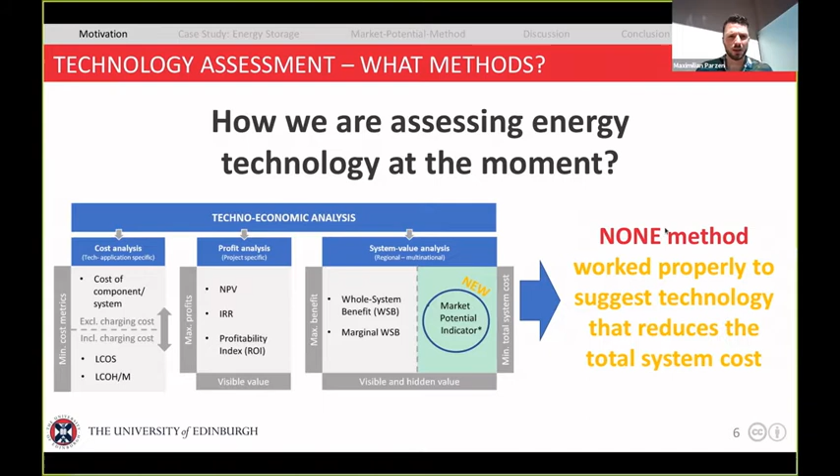When we look at well-used cost metrics like the LCOS for energy storage, it's similar to the LCOE. They really talk about how a minimum LCOS shows some kind of competitiveness, and we're talking about this metric saying one technology is more competitive because it has a minimal cost than the other. But I think that's not really working that well.

We show that today with a small energy storage case study, and we account for values of energy arbitrage and seasonal reserve provision.

So how does energy system modeling work? They generally minimize yearly system costs, which consist of annualized capital cost, what I need to invest, and then the marginal cost for operating these units. What the models do is constrain basically what is possible by adding physics. For example, I cannot produce as much as I want. To have a stable grid, it should just produce as much as is needed, so energy meets the energy demand.

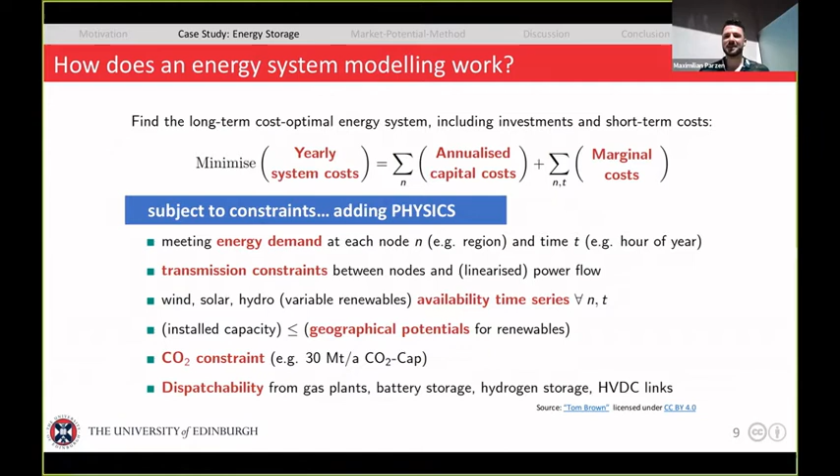So physics is one thing, and realistic data is another thing. The tool we are using for the study is PyPSA-Eur.

It's a workflow to build a model from open data. It covers the ENTSO-E area and contains a lot of data from power plants to electrical demand, availability of different generators. We also have real environmental data on solar and wind situations, and that's what we include to get a realistic representation of the energy system.

What we did in our study is add technologies. We added electrolysis, so basically hydrogen technologies, and battery, specifically a lithium-ion battery. For the hydrogen technologies, we actually divided our categories into a low and high hydrogen storage case, high LCOS storage case.

So we had different technologies. For the electrolyzer in the low LCOS case, we used alkaline, and for the fuel cell, the PEM fuel cell. For the high LCOS case, it's the solid oxide electrolyzer, and the same for the fuel cell. Then just as a benchmark, we had the battery inverter. So we added investment costs, lifetime data, efficiency, discount rate for each technology, and also the energy-related components.

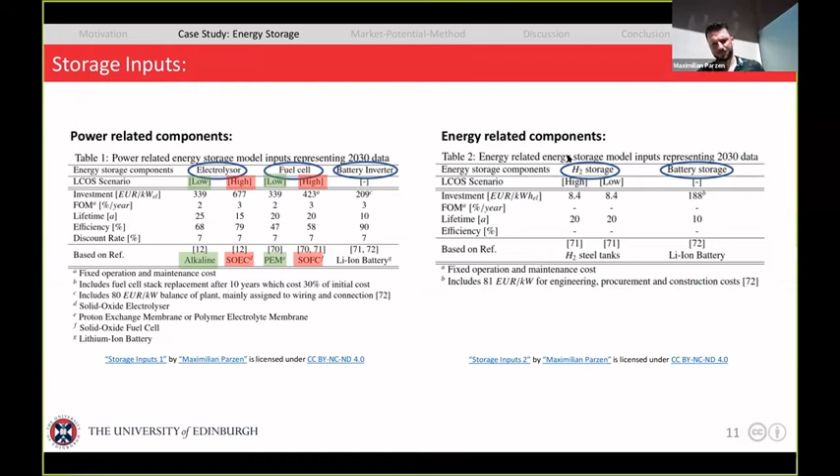What we figured out is, looking just at the LCOS, the battery is definitely the cheapest one. Then there's another low LCOS case, which I just mentioned with the different technologies, and they differ from this high LCOS case by about 5 cents per kilowatt hour. So what you would logically think is, there's a good reason that the low LCOS technology is the preference, maybe that's the technology I should develop. But we'll see in a bit that's not really always the case.

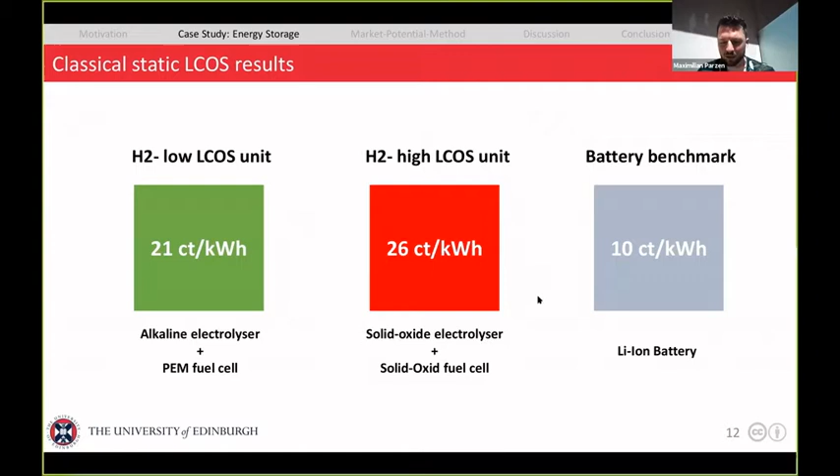So we have really a wide span. Assuming constant full load hours, which is usually used in LCOS studies, is also dangerous, because we have a wide range, from 200 to 800, 300 to 1,200 full load hours, and battery storage is also varying a lot. But what's crucial is that we have a market potential that exists for all kinds of technologies, low LCOS, high LCOS, or battery units. That's the striking point, because it means all technologies lead to a lower system cost. So it makes absolute sense to invest in all of these technologies.

So why do we assess the LCOS? Sorry, can you hear me? Yes, we can. It was just some background noise. Don't worry, it's okay.

So what we introduce here is the market potential method to guide innovation. As you just saw, it's just the market size, which is optimized by the energy model. What we basically say is: look at a set of probable scenarios, assess these technologies, and then make a decision. This decision should be systematic, which is why we introduce the market potential criteria to make this kind of decision, and decisions are actually often subjective in a way, and you will see why.

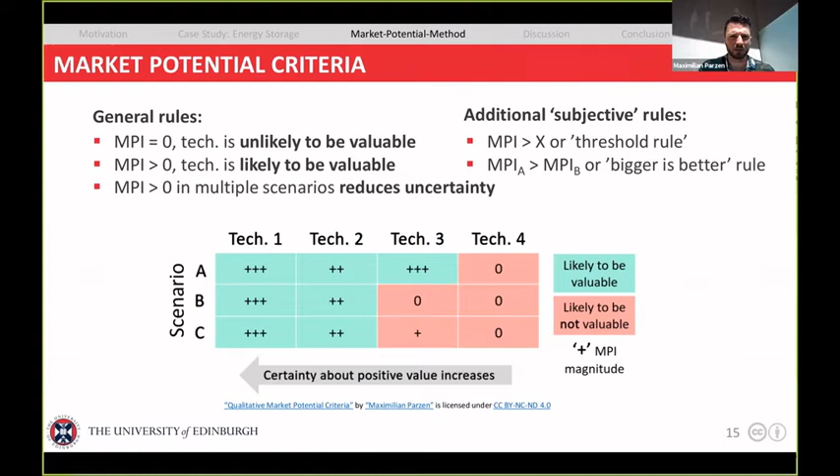So we applied that same method in our case for 3 different scenarios. We changed the technology representation a bit, which is why we have 3 different scenarios. One was related to fixed energy-to-power ratio, meaning we're not sizing any kind of storage flexibly. But in fact, with redox flow batteries or hydrogen technologies, we are flexible with sizing—we can size the charger differently from the storage tank or the discharger. That's what we included in this variable energy-to-power ratio. And in this hydrogen hub ratio, we mixed the hydrogen technology a bit.

So looking at the 3 scenarios and these different technologies—electrolyzer, fuel cells, and batteries—we found that the solid oxide fuel cell, which had a high LCOS ratio, is really a good technology. It's not bad at all; it's actually optimized up to 95 gigawatts in Europe in our 100% renewable case. So this is where you see that LCOS doesn't work well—the technology is really good across all kinds of scenarios.

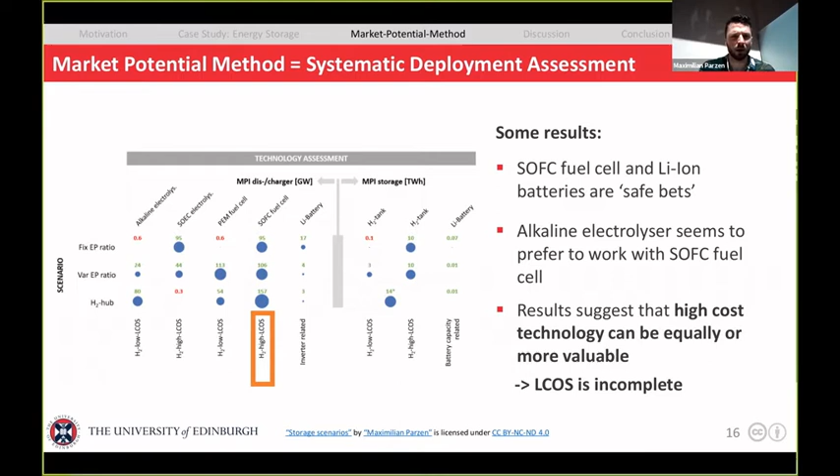Okay, now let's relax and consider that a bit. People might think, okay, these are models, they're not always right, and actually they can never be right—if we look into the future, it's always uncertain. In a way, modeling can improve. We can include other values—for example, in energy storage, there are different kinds of services we provide. We can include more sectors, we can add more technologies.

All right, I think now it should work again.

We can add more technologies. We can improve the data situation. We can put better data into this model. We can expand to new regions, adding nonlinear effects, and improve also the energy market representation, because the market doesn't really work as perfect as we think.

But one key point is that modeling can at least improve, and these other methods actually have this flaw in the method itself. It can be also sometimes, I'm not saying that LCOS is not always good, sometimes it can be good, but especially for seasonal storage technologies or other technologies, it might be worth additionally considering this kind of market potential.

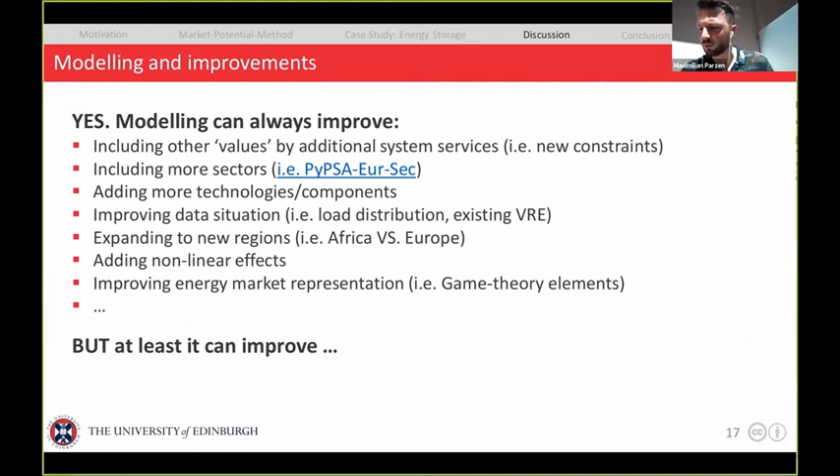And one really key message you should take away is that lower cost is not equal to higher value. We heard that a couple of years ago from Lion Hirth as well. He was actually an inspiration to this work here. He tried also to come up with a method.

I wasn't so convinced by that, and that's why we developed the market potential method, which is not something crazy from the methodology. We're just looking at what technology is deployed, but we figured out in our paper and wrote it down why we're doing that and why other methods have problems and limitations, and why maybe this method could add some extra features.

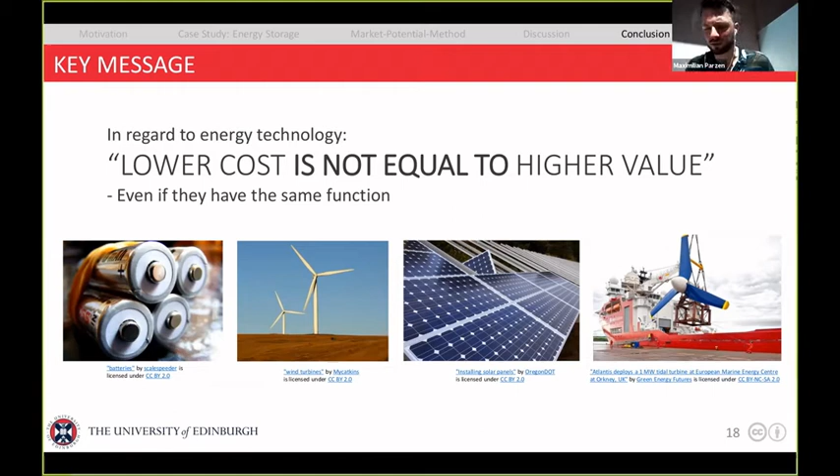Looking at applications of the market potential and some future work: where you can use the market potential method is really to give technology design recommendations. You can say, okay, what storage is good? Is it a low wind generator or high wind generator that's good? Where should I place my assets? What is the value of demand response? How should I design demand response?

Evaluating also energy technology market potential, so how big is my market for each technology? That's the stuff I can really do with this metrics method that we developed. And that's key, I think, for business decisions.

Future. Sorry, yeah, Maximilian, to interrupt you — we just finished the time of presentation. Thank you very much. I don't know, you can wrap it up. Yeah, if you give me one minute. Yes, okay, yes, of course.

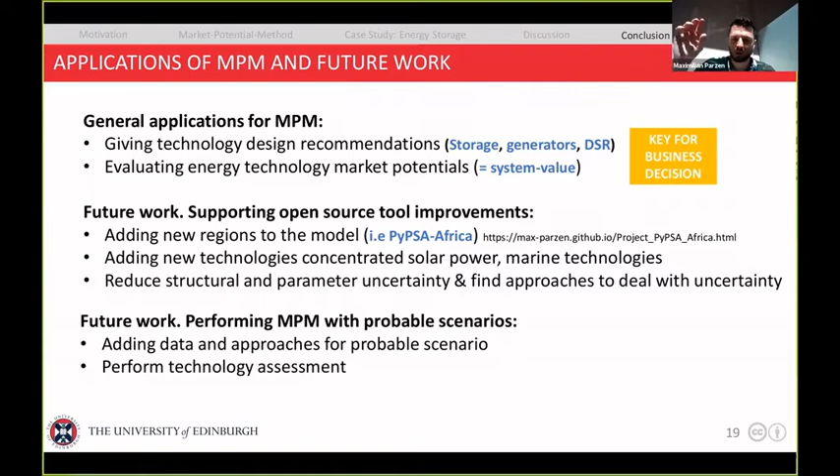I just want to mention that we are working with a team now on expanding our model to Africa, just to give this worldwide view of the market potential, because a company just doesn't want to look at one continent. They want to, in the best case, look globally. And we're starting with adding now Africa to this model. The project just started recently. We are more than 13, mostly PhD students, working on that. I have 10 advisors, and if you're interested in the project, just look it up.

And that's it. Yeah, thank you very much. Thank you, Maximilian, thank you very much.

So this first presentation was very nice, and it was very clear for me. I think there will be many questions, and I can see at the end Rodica has some. So I give you the floor, Rodica, for the first question.

Okay, so good morning. Thank you, Monsieur da Costa. Thank you, Maximilian, for this very nice, clear presentation from your sunny corner. First of all, I would like to be sure your LCOS is based on the energy discharge. Is that so? Do you have a formula? So your levelized cost of storage is based on the energy discharge only, is that so?

Yes, I can show you the equation. Okay, so I'm waiting for the formula, but how different in this case is this LCOS from the classical LCOE, from the traditional LCOE? How different is this, where storage is accounted for?

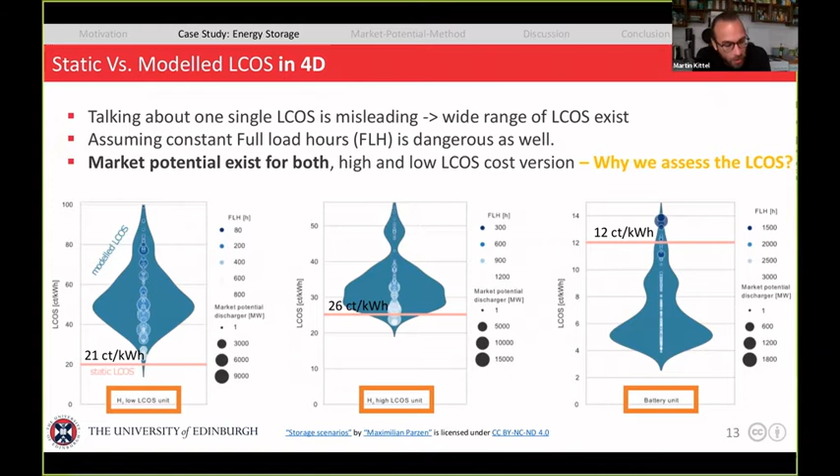Yes, hi. Max, thank you for the insightful presentation. It's an interesting approach. I was wondering, when I saw your scenarios, you want to come up with an approach that evaluates the market potential. So your idea, if I understood it correctly, is to look at different scenarios and then see which technology always remains within the optimal capacity mix, so to say.

But I was wondering about your scenarios because they're specified to some modeling intricacies, right? Whether you have a fixed E to P ratio or variable E to P ratio, and the applicability of some storage technology also depends on the constitution of the optimal capacity mix. So I was wondering, why do your scenarios refer to these modeling specifics instead of, for example, looking at a different capacity mix, right? One scenario with more PV and one with more wind.

I think that's, thanks, Martin. I think you spotted something really important. Maybe I forgot to mention it. The scenario selection we chose is not complete.

What you should do in a best case is, for example, pick the ENTSO-E scenarios, which people align their view on, like the ENTSO-E outlook. They have 3 different scenarios, and I think if we could apply this methodology to these ENTSO-E scenarios, then we'd have different views. And if I'm a storage developer, I should also consider maybe 3 different technology constraint scenarios. So at the end, 3 times 3 would end up with 9 scenarios, to have this technology detail and differences, and also this kind of 3 realistic, probable future scenarios.

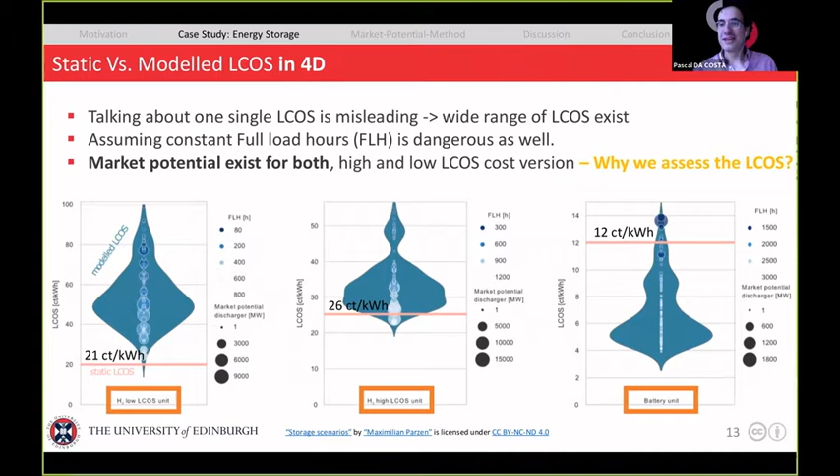Okay, good. Martin, is it fine for you? Or do you have other questions or discussions? No, thank you, that basically answered my question. Thanks, thank you, Maddie. So if there are no new questions, we can move to the next presentation by Martin.

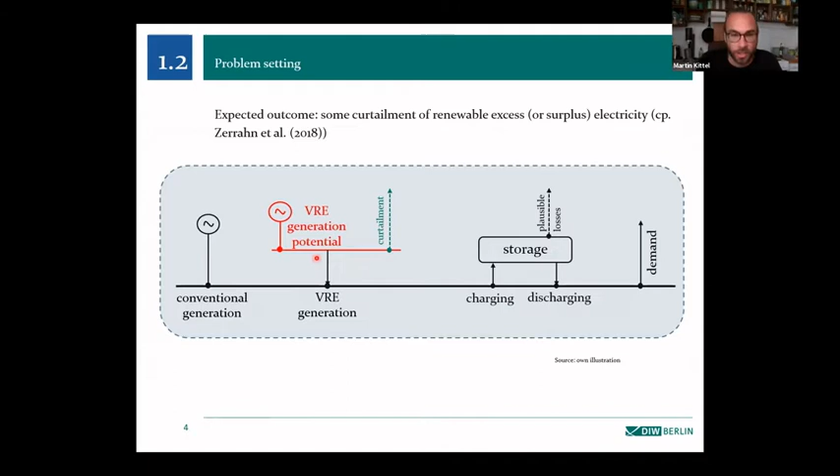So as I just mentioned, what we expect an energy model to do if there is surplus renewable generation due to beneficial prevailing weather conditions is to curtail this excess electricity. However, if we now impose a minimum renewable share of this form, so that total annual generation from renewables has to exceed a certain share of annual demand...

what can happen is that we see unintended effects, and these effects are as follows: since the model, due to this constraint, is inclined to drive up renewable generation, it may occur that it does not curtail the renewable surplus, but instead feeds this excess electricity into the grid and then erases it via charging and discharging the storage unit within the same period. And this charging and discharging then creates additional unintended storage losses.

So we define this phenomenon as unintended storage cycling, which is simultaneous charging and discharging of the same storage unit. We consider this excessive because in the end, when you work with energy models, only the net effect of charging and discharging matters for the energy system balance. And again, this behavior only arises within energy models, it's not a behavior that we see out there in reality, but only in our models, yet it potentially causes unintended effects, as we just discussed.

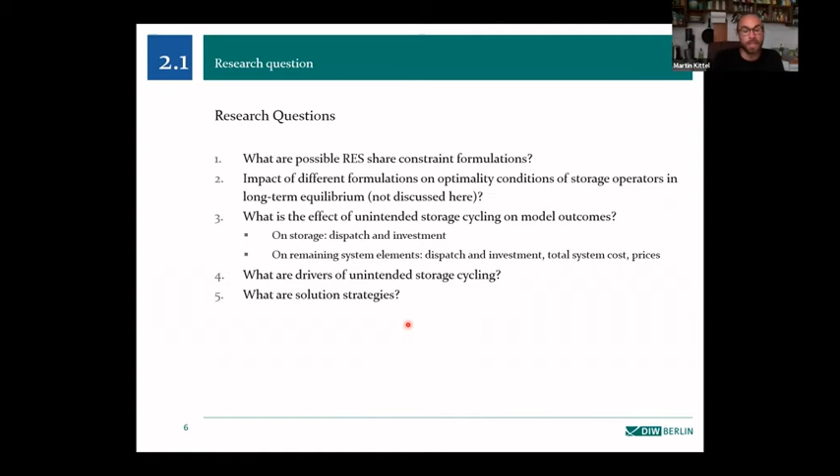So what are our research questions? First, we would like to systemize possible ways to implement renewable share constraints. Second, we would like to investigate the effect of these different formulations on optimality conditions of storage operators in long-term equilibrium - this is not really discussed here due to time constraints, it's part of the paper. Third, we would like to quantify the effect of this modeling artifact on numerical model outcomes, namely on storage and remaining system elements, and we'd like to identify drivers and, in the end, solution strategies for the artifact.

Are these questions relevant at all? Well, we believe they are because binding renewable targets are commonly used in climate policy. For example, in Germany, Germany foresees a 65% share of total consumption being from renewable energy sources by 2030, or most recently, the Biden administration announced the target of a fully renewable power sector by 2035.

In order to investigate possible pathways for reaching these targets, numerical models are used both in the research domain and in policy consulting. This artifact, unintended storage cycling, potentially distorts model outcomes and thus also policy recommendations, and we would like to avoid that.

So these renewable shares are also commonly applied in the modeling domain. Let's move to our methods. We first looked at 12 different implementation strategies for binding renewable energy targets. We have first 4, let's call them constraint families.

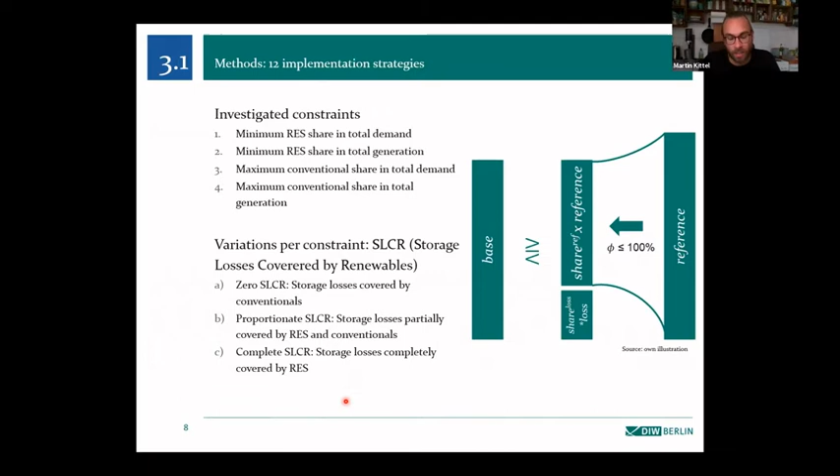We use a stylized numerical power sector model, which is essentially a reduced version of the detailed model that we use here at the DIW. It depicts a power sector only for one region, and is a linear partial equilibrium model that essentially minimizes total system costs. Max, thank you for this introduction on energy system modeling.

So now you already understand how these kinds of models work. We have just a very limited set of renewable generators and conventional generators and one storage technology, and the model optimizes both capacity and dispatch decisions for one target year. We parameterize our setting loosely to the German power sector for 2030.

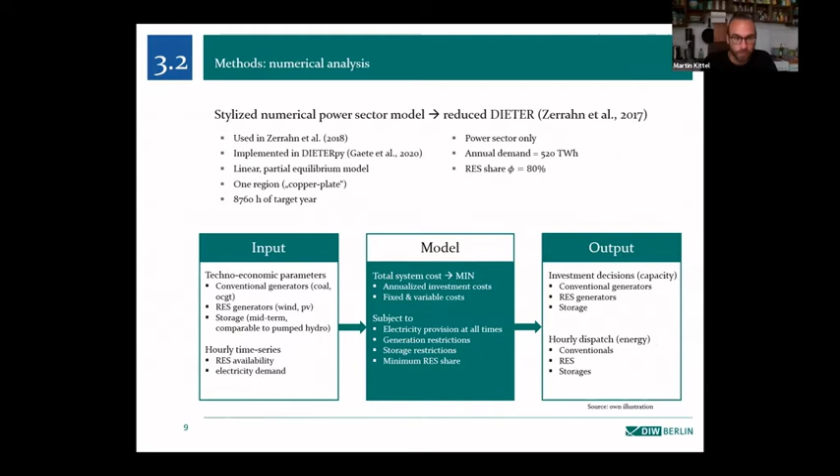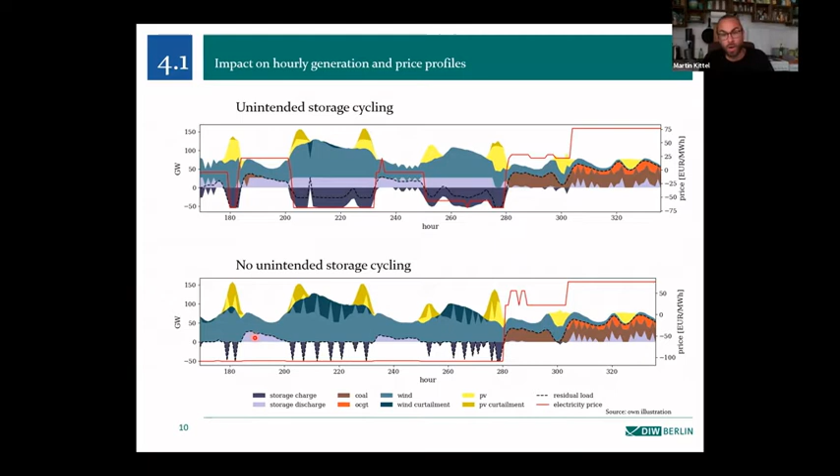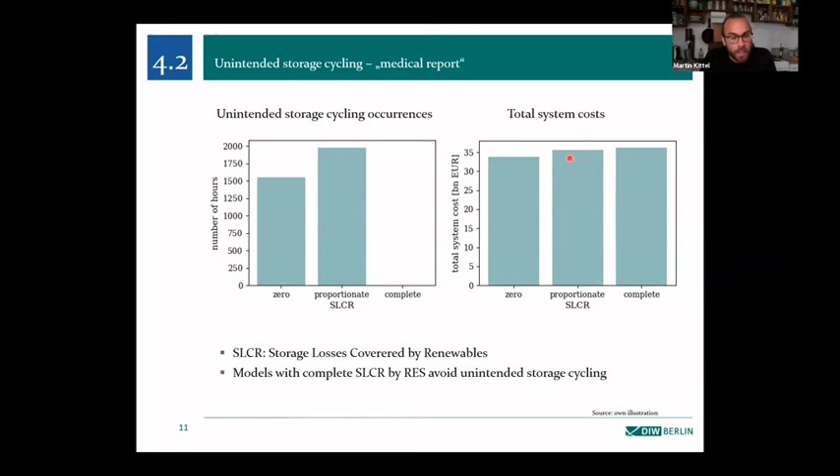We have, even though it's a very stylized setting, a number of complex effects that are somewhat amplifying and overlapping each other, but I'm going to try to highlight the most important ones here. So first of all, what do we see?

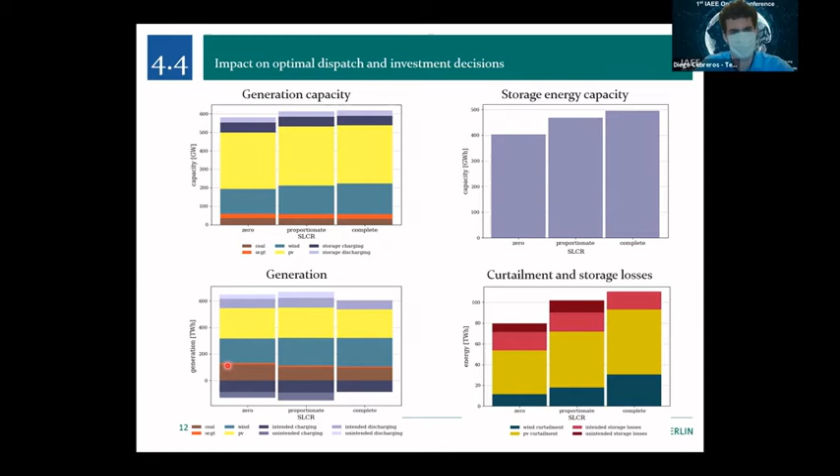Let me mention one more effect. Effectively, and this is a bit hard to elaborate or show, these different variations—zero storage losses covered by renewables, proportionate distribution amongst conventionals and renewables, or requiring storage losses to be completely covered by renewables—effectively increase the ambition level of the renewable constraint. Here in these settings the ambition level is lowest, and then it increases up to here. So all these effects I just presented are partially also driven by this different ambition level of the renewable constraints.

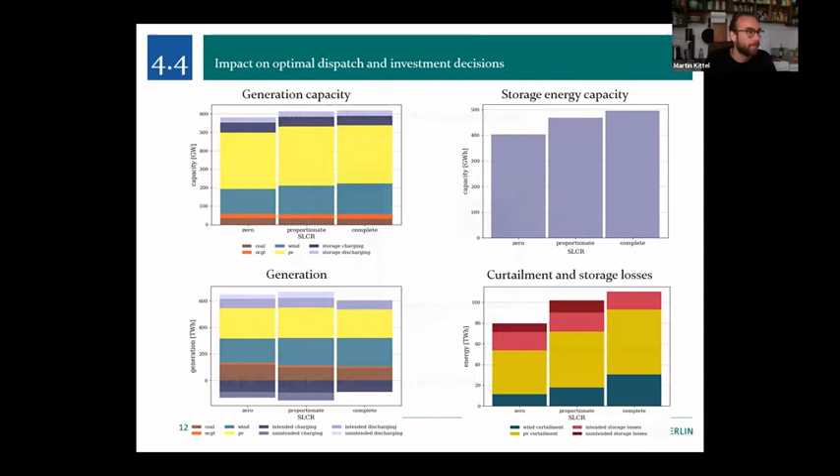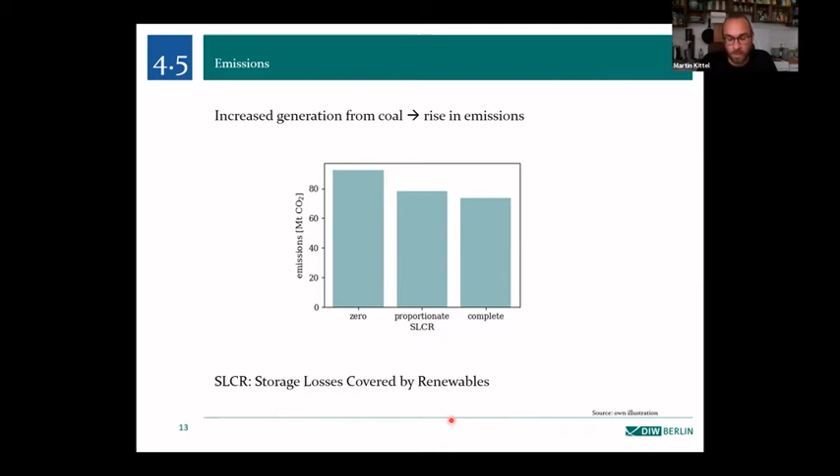Maybe one more point, not a key insight but a consequence of this change in the generation mix, is that we have an increase in emissions. Given the context of binding renewable targets, which is meant to facilitate decarbonization, this is also an important insight—if the modeling artifact occurs, in the end emissions in the system will rise.

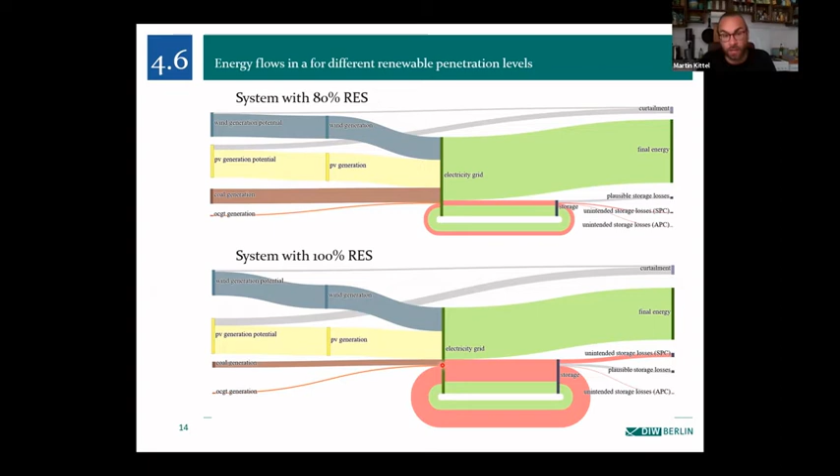What we see is that the extent of unintended storage cycling rises disproportionately for higher renewable shares. So as we move towards a fully decarbonized power sector, the artifact's impact actually increases.

So what are possible solution strategies? As we already have seen, requiring in the renewable constraint that all storage losses are covered by renewable generators solves the problem. That's very important, and this is also our recommendation how to treat the problem. However, one needs to be aware that this is overly restrictive.

This constraint then requires a little bit more renewable generation than the policymakers' notion of a renewable share actually requires. Policymakers say the renewable share is total renewable generation over all generation in the system, which implies storage losses should partially be covered by renewables and conventionals. Here we recommend that all storage losses should be covered by renewables.

There are also possible alternatives, and due to time constraints, let me only discuss the CO2 versions. You could impose a CO2 budget or a CO2 price, and if storage use in energy models is priced, so if there are costs attributed to storage use, then the modeling artifact does not occur anymore because the model has no incentive to drive up renewable generation.

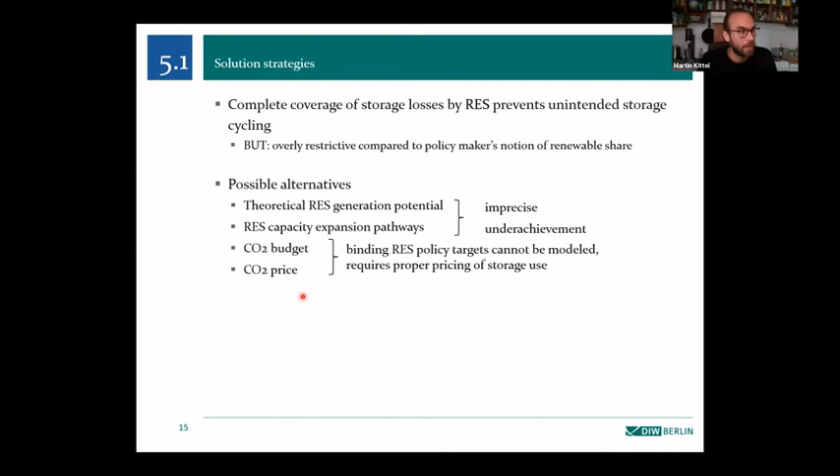Let me mention one more very important factor when departing from our stylized setting with the power sector only and moving to more sophisticated, full-fledged energy system settings, where you also look at sector coupling options, for example.

What we see is that unintended storage cycling is essentially a special case of unintended energy cycling. So wherever in the system the chance arises to convert curtailment into additional losses, be that, for example, conversion losses for battery electric vehicles or standing losses for liquefied hydrogen, or even transmission losses in a multi-regional setting.

The model will always be inclined to convert surplus electricity into these kinds of losses to meet the renewable constraint at lower costs. So wherever unintended energy cycling is possible in these models, the artifact may occur and may distort modeling outcomes.

So to wrap up, what have we seen? We have seen that unintended storage cycling has a significant effect on modeling outcome, and implementation matters.

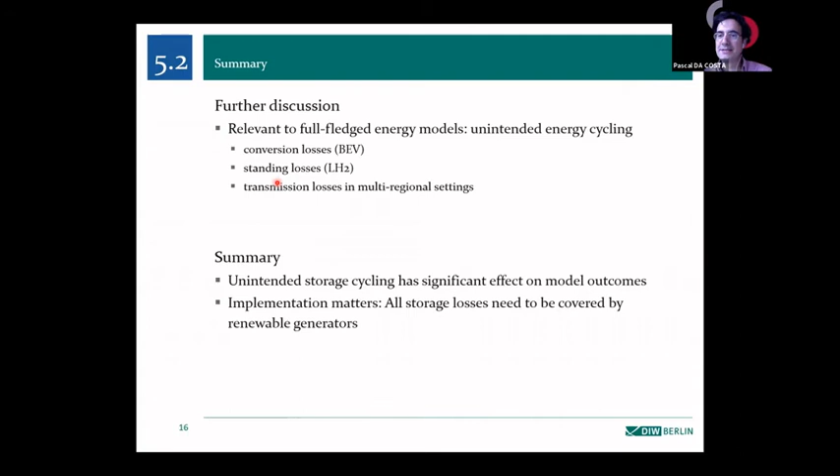Thanks, Martin, for this wonderful presentation. I just want to strengthen the point that in modeling, Martin and I are collaborating on this topic as well, on how to remove this effect in energy models. We also discovered this effect in PyPSA-Eur, and we counted, I think, 5,000 hours. I think you mentioned around 2,000 hours; we counted some 5,300 hours or something like that. So it's really something that can happen if you're not modeling carefully, and it can distort your technology's behavior in a way. That was just a comment. Thank you.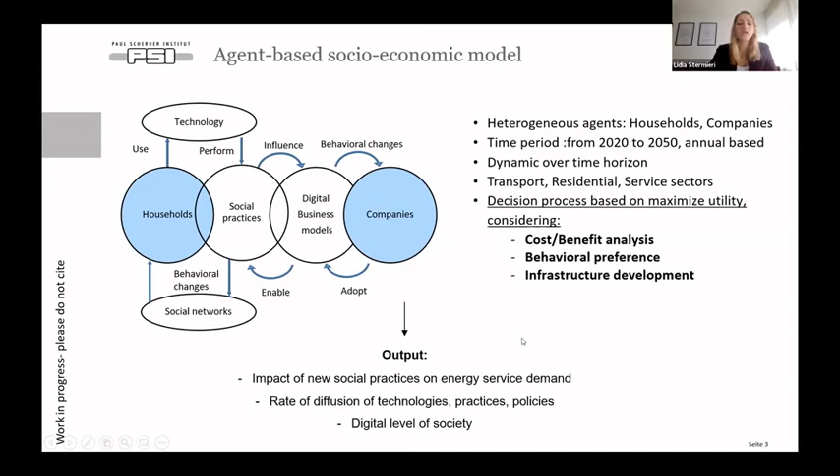The time period the model covers goes from 2020 to 2050 on an annual basis, dynamic over time, and includes different decision processes that we will analyze later. The outputs from this model are the impact of new social practice on the energy service demand, the rate of diffusion of technologies and practices, and the digital level of society.

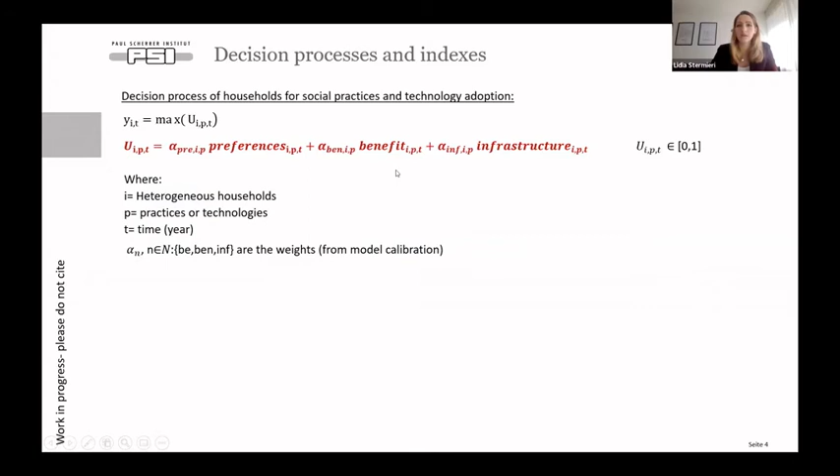So let's analyze the two decision processes. The decision process of households for social practice and technology adoption is based on wanting to maximize the utility function, and the utility function is based on three main components: one is the preferences, one is about the benefit, and one is about the infrastructure development.

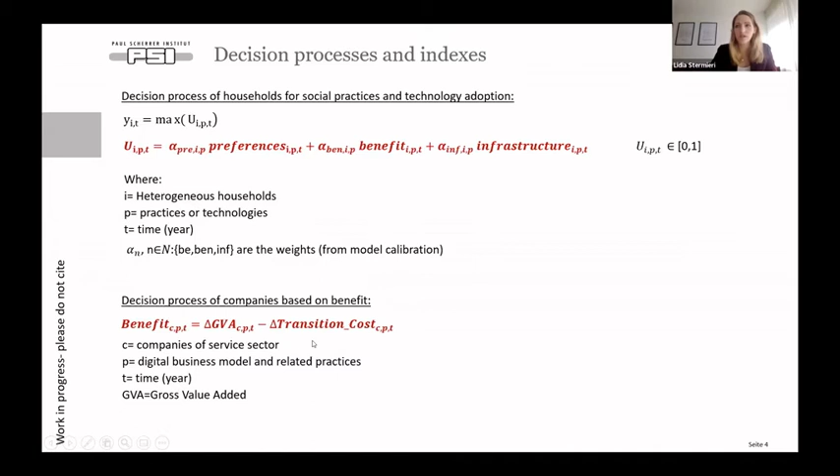Instead, the decision process of companies is based on the benefit. The benefit is calculated as the evolution in the gross value added minus the evolution in the transition costs, which are the costs to move from an analog business model to a digital business model for the company.

Now let's start with discussing the decision process of households. The first component of the utility function is the preference. Basically there are household preferences and technology attributes, and we want to select the technology that better matches the preferences of the households. Let's give an example of how this component works.

If we want to analyze household preferences for the concept of environment, we can see that this household gives the environment the maximum value, so 1 - all attributes go from 0 to 1. This household has to select between two different technologies, technology 1 and technology 2, which have two different values for the environment attribute. From the calculation of preferences, we see that for this household, the best technology that matches his preference is technology 2, where we have the highest value for preferences.

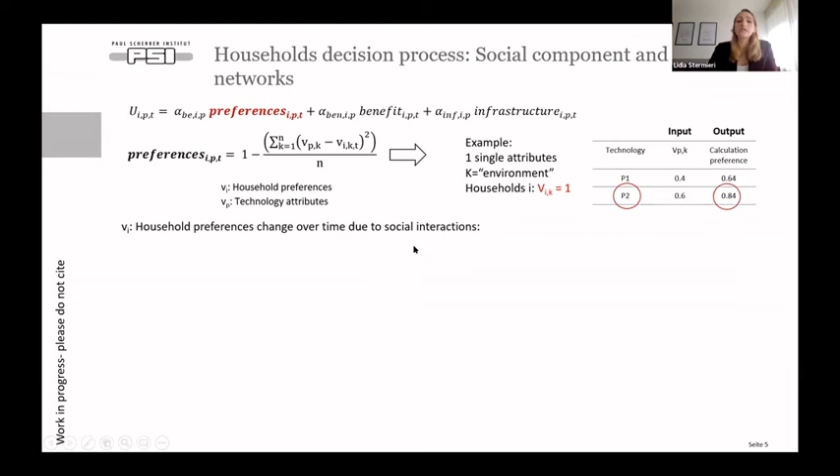The households' preferences change over time due to social interaction, so we also simulate a social network in our model. Actually, there are two different social networks. One is the set of agents that are in the physical network of agent i - basically there is a neighborhood.

The second network is the virtual network that basically simulates the network created through social media. The agent is then able to change its preference and its behavior through interaction with other agents, following a social opinion dynamic. The two main parameters for this interaction are the speed of preference change - each agent has a different adaptation to a new preference or behavior - and also a trusting interval, that defines when an agent decides to interact with another agent and change its preferences through this interaction.

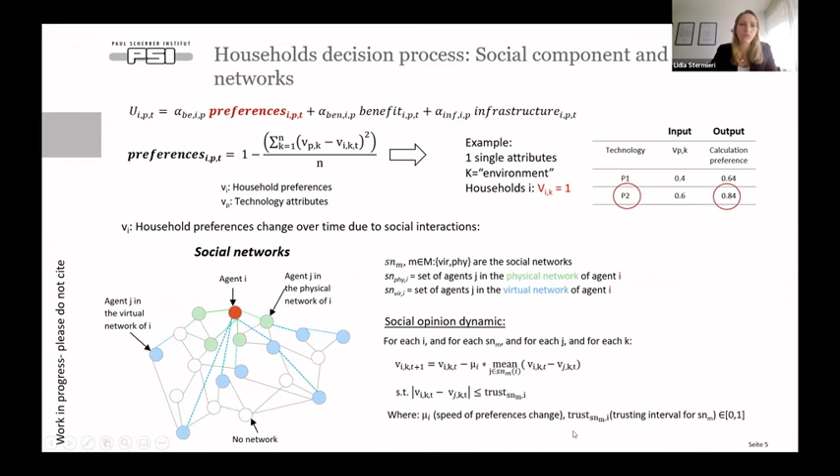The second and third components of the utility function are represented by the benefit and the infrastructure component. The benefit component accounts for the budget of the households and also the annualized net present value for the technology, defined considering the capex of the technology, the opex of the technology, the lifetime of the technology, and also the discount rate. Here we can immediately see the connection between the two models I told you before, because all the information for the calculation of the annualized net present value is an input from the energy system model.

We also said there are different sectors simulated in the model: transport, residential, and services sectors. We can see, for example, how these sectors interact through the budget, because the household's budget has to be distributed across different technologies that belong to the transport sector or the residential sector.

And in the end, we define also some deployment of infrastructure for the different residential sectors. When we model the transport sector, we include the infrastructure deployment as a society component, but we consider also the anxiety of each agent for the deployment of this infrastructure. This anxiety depends on how much you need to use this technology.

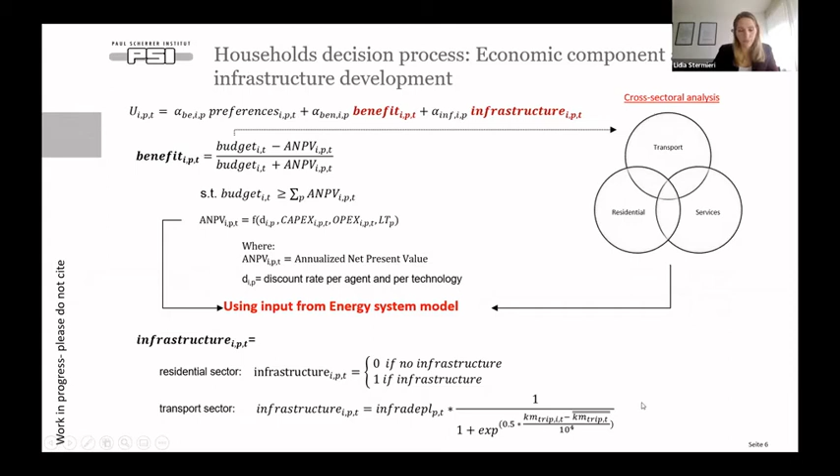Then we can move to the decision process of the company that is based on the benefit. We have that the benefit is positive, or if the benefit is negative but the willingness of the employees of this company to perform a practice is higher than a threshold value, then the companies decide to invest in digital business models, increasing its own digital level. Otherwise, there is no investment. This means that the practice is not allowed, and the households have to change their decision process.

So from here, we can see how companies account for the decision process of households, and at the same time, how the decision process of households is affected by the decision of the companies.

To give you an example of the cost-benefit analysis for a company, we can think about the teleworking practice as a new social practice enabled by the diffusion of ICT. In the transition cost from the analog to a digital business model, we consider the cost of ICT, the training courses for employees, the network infrastructure, the evolution of the energy cost, and the administrative cost. It's also important that only sectors that can adopt a certain type of business model are considered in the analysis.

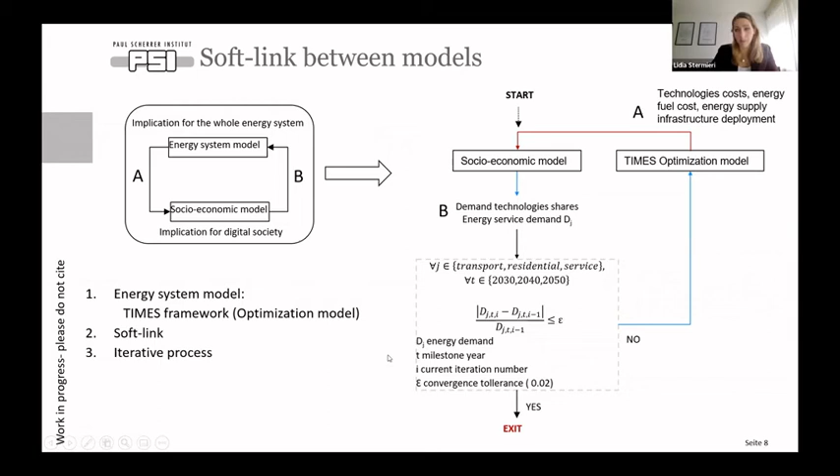Now, the link between these two models is also an iterative process. This means that these two models iterate until the convergence tolerance is reached. The convergence is analyzed for each sector, each demand, at each time step. So this is how the links work.

Now let's move to the analysis of case studies for Switzerland. And why Switzerland? Switzerland has a net zero climate target for 2050, wants to withdraw from nuclear energy, and promote renewable energy resources and energy efficiency. At the same time, there are some challenges because Switzerland has to maintain a clean power generation sector, has to face some limited renewable energy resources, and has to assure a security of supply.

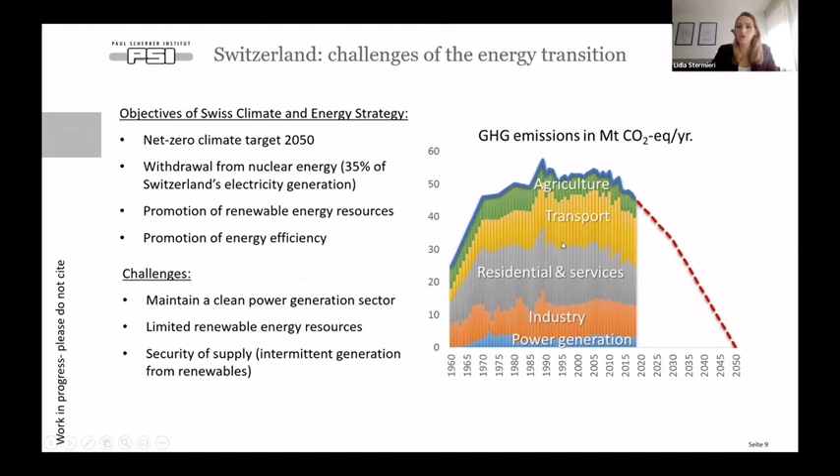It's important to note that there is already a net zero scenario for Switzerland that has been analyzed in the joint activity scenarios and modeling. We can see that to achieve this net zero target in 2050, the system has to invest in solar PV, electric and hydrogen cars, heat pumps, energy saving measures, hydrogen, biofuels, synthetic fuels, or carbon capture and storage CO2 technologies.

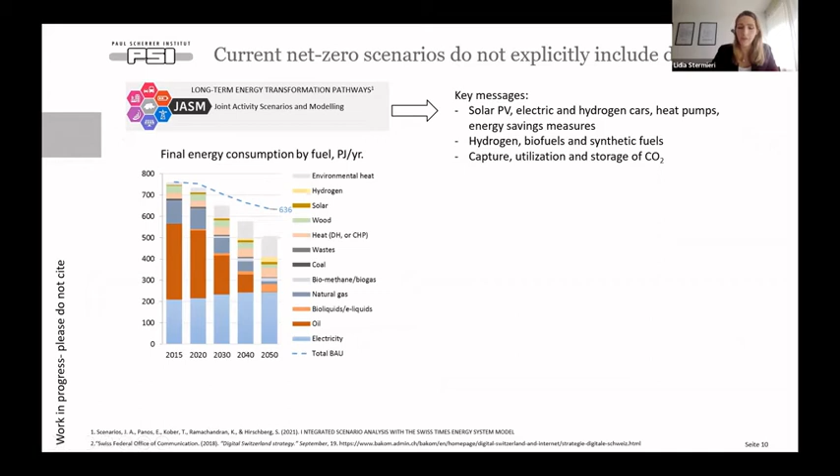But what we also want to analyze is the fact that Switzerland has a digital strategy, and it recognizes as a main point in this digital strategy the development of digital business models, the improvement of digital empowerment of the population, and the development of infrastructure. So the question is how to include this digital strategy in the net zero scenarios in order to include all the opportunities and challenges identified in the digital strategy.

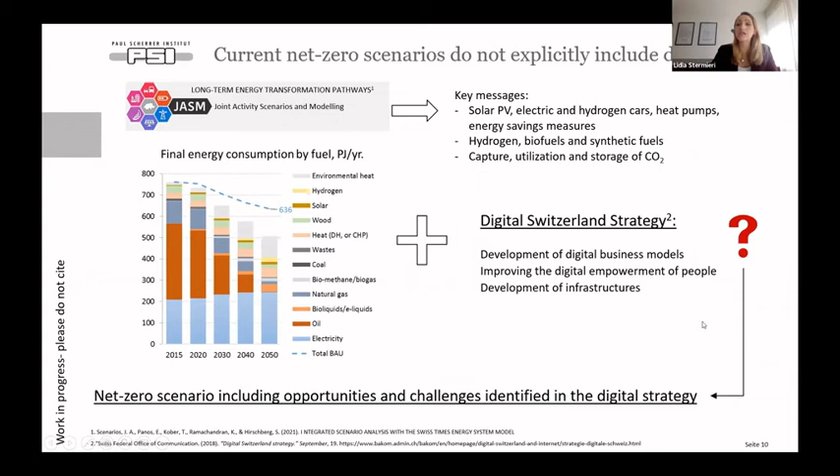Furthermore, there are several favorable conditions for the digital transformation in Switzerland. First of all, 70% of the Swiss GDP is generated by the service sector, and Swiss firms are small and medium-sized enterprises. Also, there is a stable political system with attractive economic policy.

So these are good bases to analyze the opportunities that digital transformation can bring to the society. Some of them are, for example, that digital transformation can increase resources and process efficiency, but can also ensure value creation, growth, and well-being.

So we finally apply our framework for Switzerland, and I want to focus on two main points here. The first one is the huge set of databases that we use to initialize, calibrate, and validate the socioeconomic model. There are several surveys, technology data sets, and a lot of statistics, and all these databases came from different fields of study.

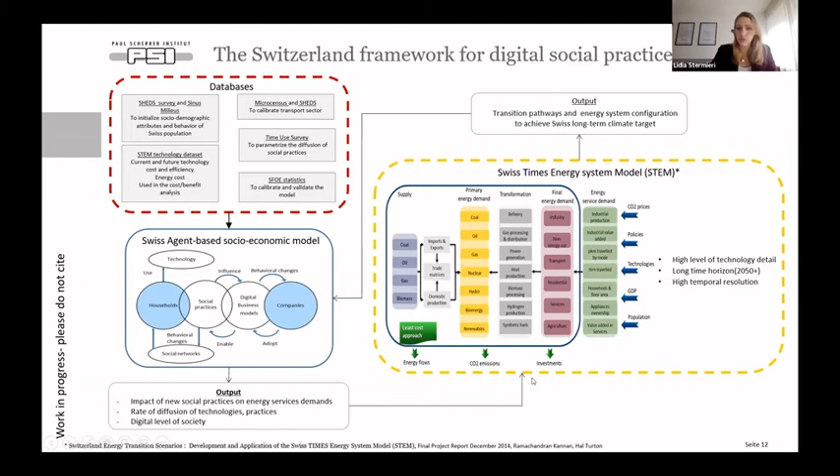So we are also able to integrate all these different sources of information in the socioeconomic model. The second point is that Switzerland already has a Swiss energy system model called STEM, developed at the Paul Scherrer Institute, which is able to represent the whole Swiss energy system with a high level of technology detail, a long time horizon over 2050, a high temporal resolution, and is also based on a least cost approach.

So now we analyze a case study to see how our framework works. We apply the net zero climate target to one social practice, as discussed before, for example the teleworking practice, and we analyze this for three different scenarios. There is a base scenario in which we assume that people performing this practice will work from home 30% of their annual working hours, and 30% of their meetings will be online meetings.

Then we have a digital scenario where this share goes up to 60% of the annual working hours, and then a new world scenario where the share is equal to 100% of the annual working hours. We want to analyze the implications this practice has on the business models for the service sector and on the net zero climate target.

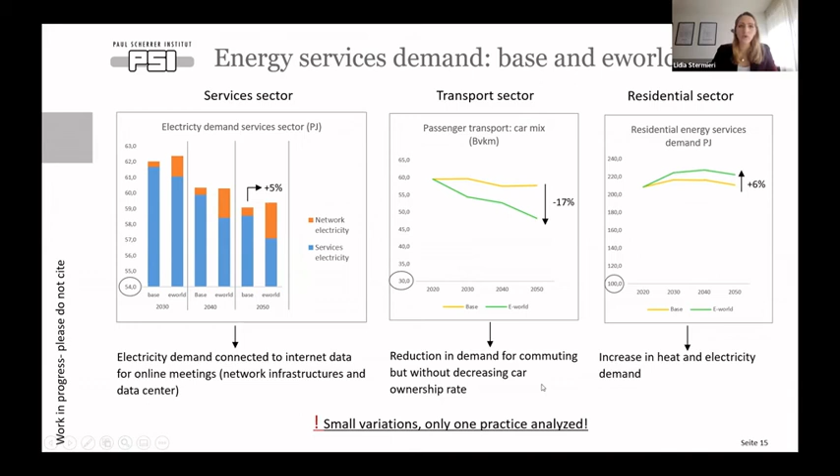Of course, these are really small variations, and we have to consider that only one practice in this case is analyzed. But even if these are small variations, we can see some implications for the energy system by analyzing what happens to CO2 emissions in 2050.

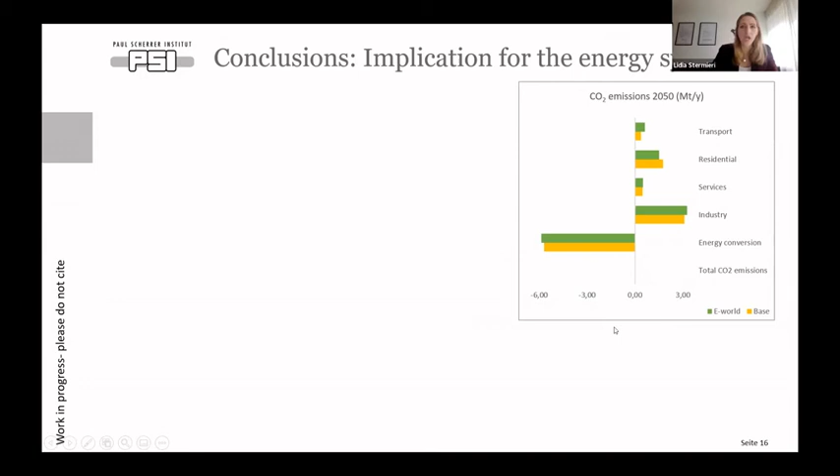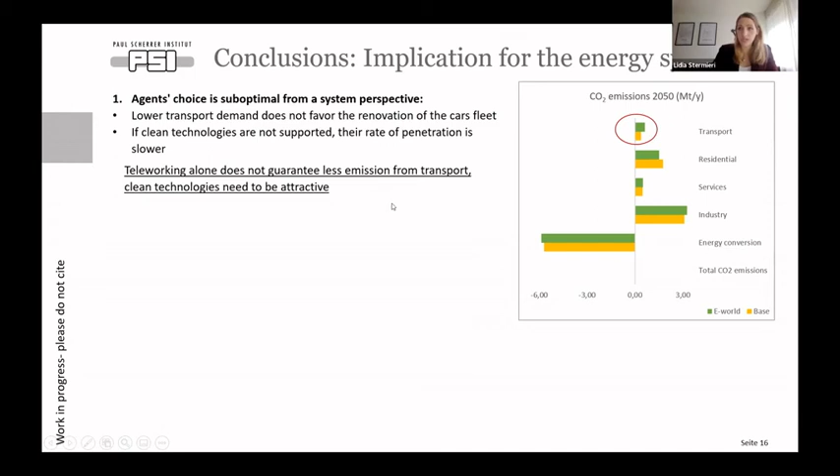The first point is that in a digitalized scenario, transport increases its emissions. This is connected to the fact that the agent's choice is suboptimal from a system perspective. The lower transport demand does not favor renovation of the car fleet if clean technologies are not supported, so the rate of penetration is lower. We can conclude that teleworking alone does not guarantee less emissions from the transport sector if clean technologies are not attractive.

We can see how the energy system reacts to this increase in emissions from the transport sector: it reduces emissions in other sectors, shifting renewable resources from industry to reduce emissions in the residential and transport sectors. But this also increases the burden on the energy conversion sector to offset the emissions.

In the end, more zero carbon fuel is used in transport and residential sectors to try to reduce emissions. But due to the limited resources of the country, the system has to increase the import of these fuels, which results in an increase of 1 billion francs in 2050 for the total annual cost.

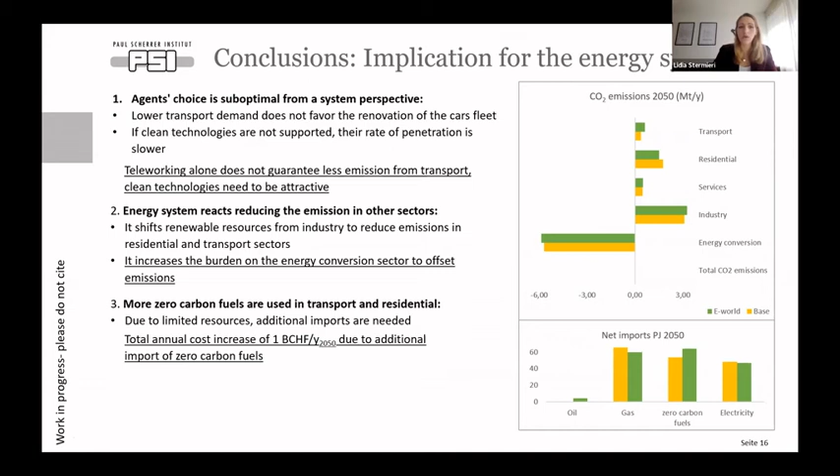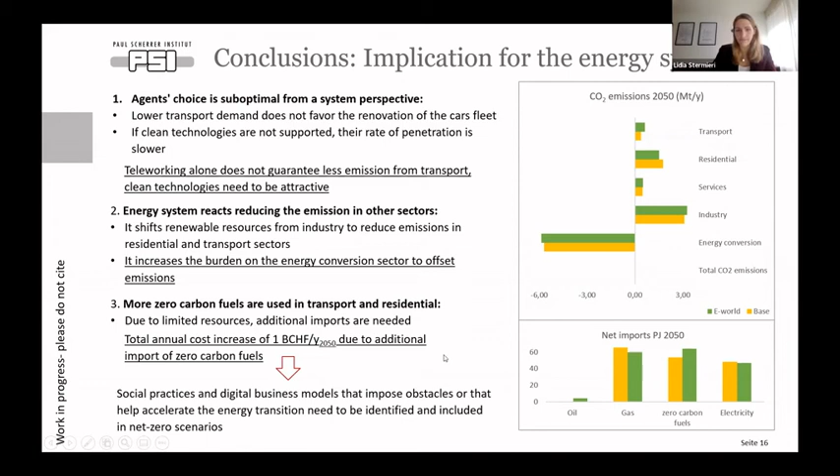So to conclude, we can say that social practices and digital business models that impose obstacles or help accelerate the energy transition need to be identified, and it's important to include this analysis in net zero scenarios. Thank you for the attention.

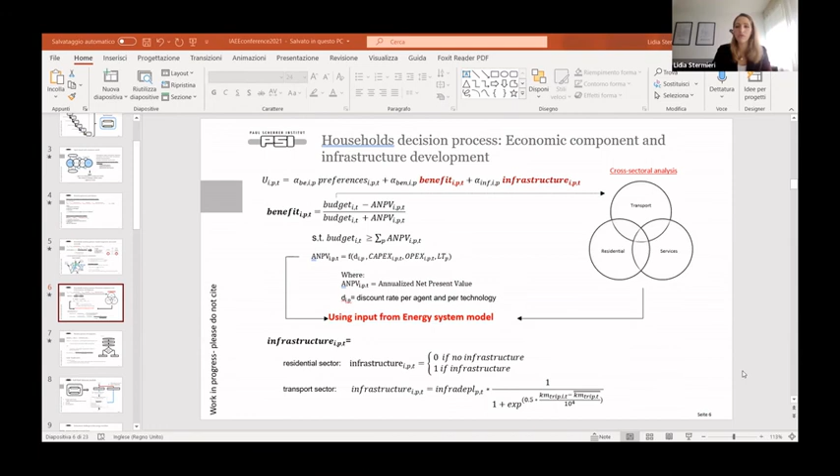Thank you. Grazie. Thanks. Thank you. Other questions?

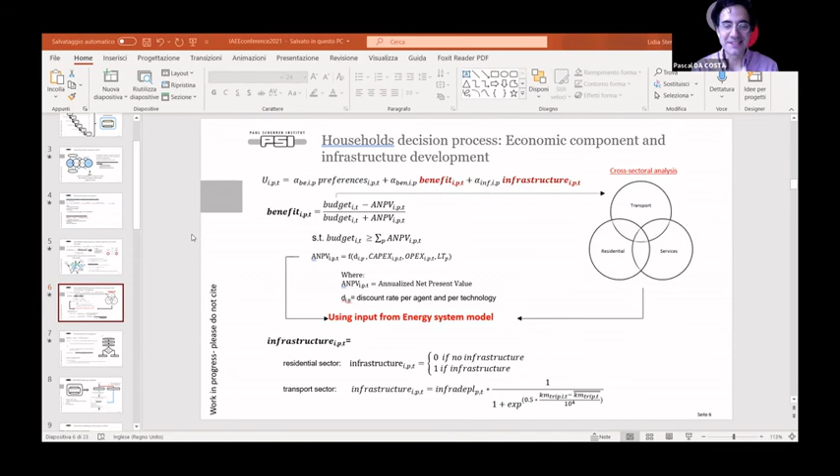From your point of view and your own criteria, which countries are the most advanced in storage issues and energy storage in Europe, or maybe in the world? From your own criteria, of course. So the question was related to which are most advanced in terms of storage, right? It's related to the technology, of course, and other things. But are there for you countries that are really advanced on that topic, and how do they work with that?

I think it's really hard to judge about that, because energy storage is actually mostly relevant when we have these high renewable penetration cases. That's where we see, okay, we're not earning any money with renewables anymore, maybe we should do some kind of time shifting. We have in some cases the usage for redispatch, and other cases where storage makes sense, also in sub-hourly cases to hold the frequency stable. So I think it's really hard to judge where's the one advanced, it really depends on the application we're talking about.